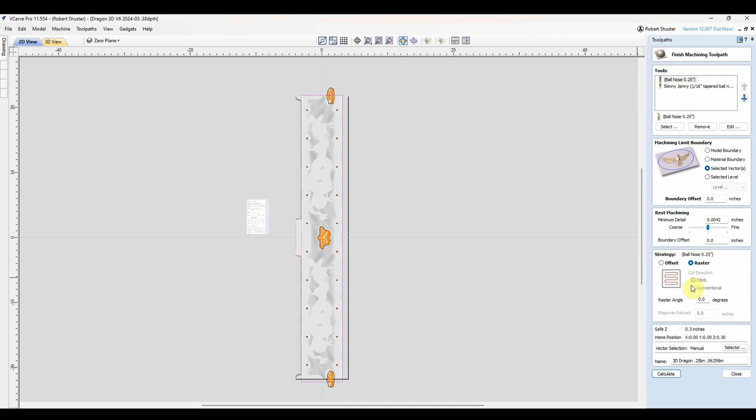For that one, again, I'm using VCarve Pro for both projects. For this one, I'm using a different kind of toolpath that I'd never used before, which in theory should be better, but in actuality, it didn't work out very well. For the finishing 3D toolpath, I'm using two bits, a 1/4-inch ball nose and a 1/16-inch taper ball nose. It's a Skinny Jenny from Cadence.

I've sang his praises before. I still feel those are some of the best bits on the market, a little more expensive, but a lot better, a lot more durability. I'm very happy with them. I'll keep supporting him very strongly.

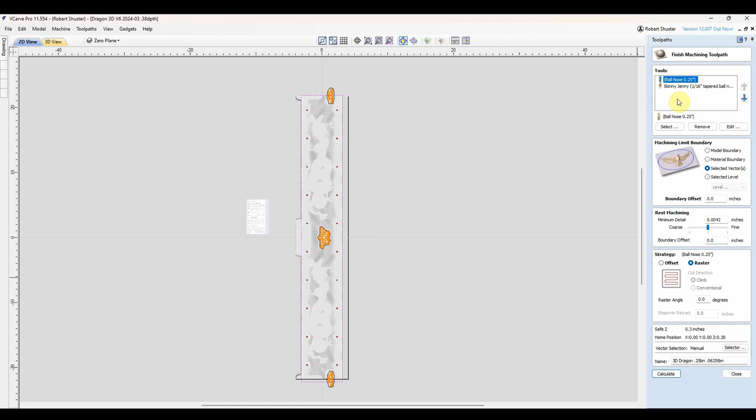Anyway, back to this. I'm using two bits for this. That's called rest machining when you use the two bits like that. Your first thought is like this is a roughing toolpath, and that's not what it is. This first toolpath does the low definition first, and then it will do the high definition later.

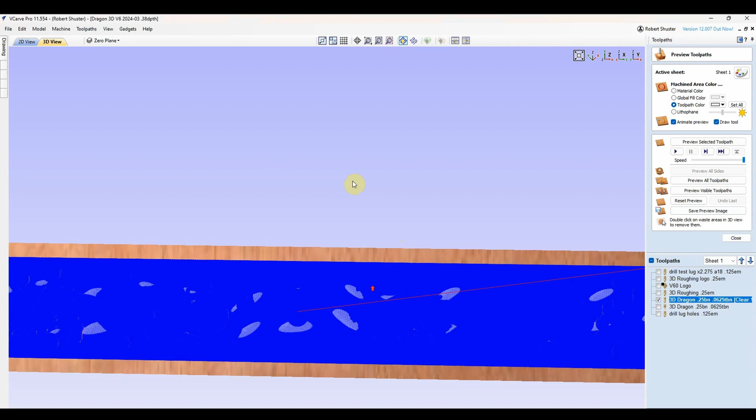Since I do a lot of talking on this, and then I have videos, there's not much to say about it. I'm going to run the video up in the corner here, so let's watch. I'll try to do the toolpath for this first drum with that one, and then when I talk about the other drum, I will show the toolpath for that one. So first is a 1/4-inch ball nose. Let's run that. Again, this is kind of slow rendering, so I won't talk during this, and I'll speed it up.

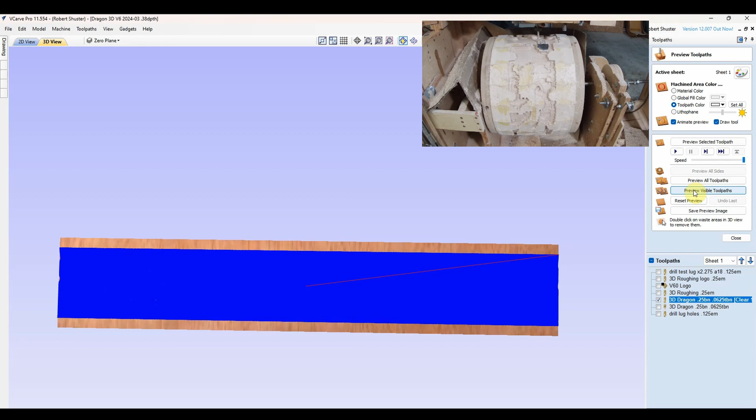The definition is okay on this. You can certainly tell it's a dragon, but once I do the 1/16 taper ball nose, it'll be much better definition. Let's go ahead and just show that.

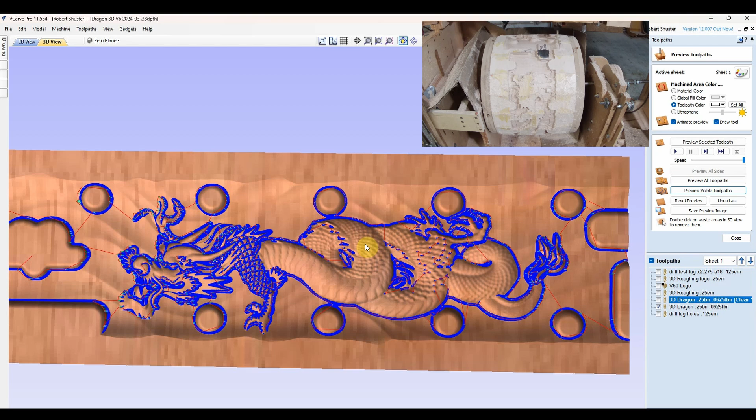This explains how the rest machining works better. The spots where like these scales aren't high def, relatively smooth, not that deep, sharp edges, the 1/4-inch ball nose should do fine. And then once we zoom in, we can see that the little 1/16-inch taper ball nose really gets those nooks and crannies much better.

So I'm going to undo this, so you can see that picture right there of the dragon. I'm going to run this toolpath, and you can see - oops, wrong one. Run this one, and we'll see how much better the definition will be. So I'll probably copy the screen here, and then run this and show still the other one. So I'm going to preview the other one now. Again, very slow, so you won't hear me talking for a while.

As you can see, these scales have much better definition, and the face, the eyes, even the eyeballs come out much better now.

So in theory this should be a lot faster. Let's pull up the two toolpaths, and I'm going to hit clock here. It says 4 hours 52 minutes for the 1/4-inch and 3 hours 22 minutes for the 16th.

VCarve Pro tries to guesstimate how fast it's going to be, and on my settings I usually beat these speeds by quite a bit. The more definition there is, the better mine does against those times. I have theories on how this estimating time works, and normally I can guess pretty close from that how long it's going to take. In this case, I was way wrong.

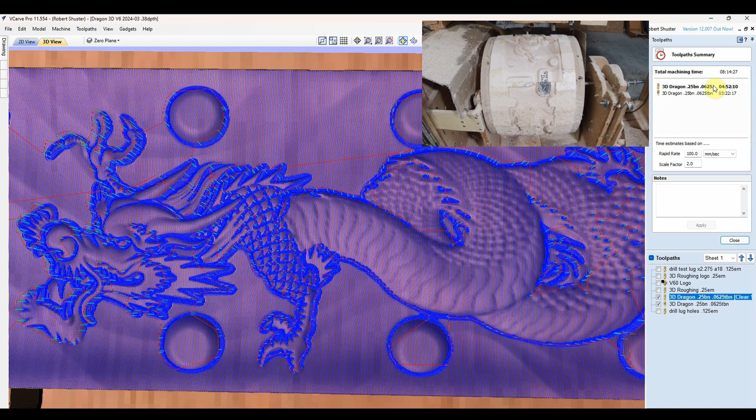The 1/4-inch ball nose, I beat that, and actually I had the setting set on that one a little different. My thought, which was incorrect, is that a bigger bit doesn't need as tight a step over, so I was running 10 or 12%. It said 3.5 hours when I ran it. That is not correct—you still need an 8% step over or less to get a good finish. Yeah, you learn from my mistake.

There were other issues with this drum—it wasn't going to work. I knew early on it was a test drum, so no big deal.

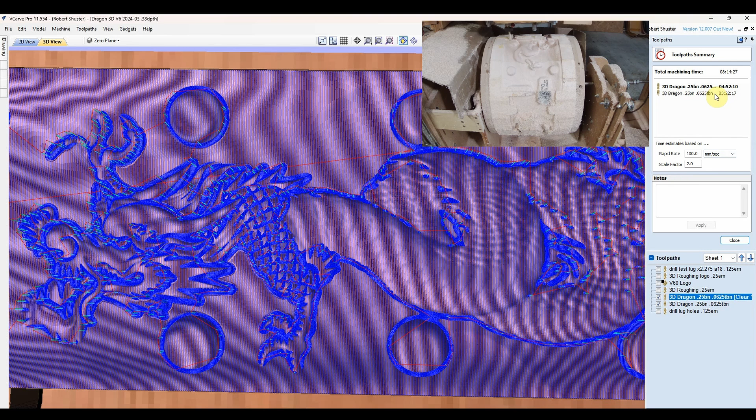Now the other part says 3 hours 22 minutes for that. So when I first did this, I thought I could have a good 3D drum finished in 6 hours, since I usually beat these numbers. I was kind of excited this might work.

Problems—first of all, the tapered ball nose one, I ran 5, 6 hours and it was only half done. It guessed completely wrong on the speed there. Completely wrong. And after we run this I'll unclick that—you can see these little tooling lines where it goes between bits. I had those, big time.

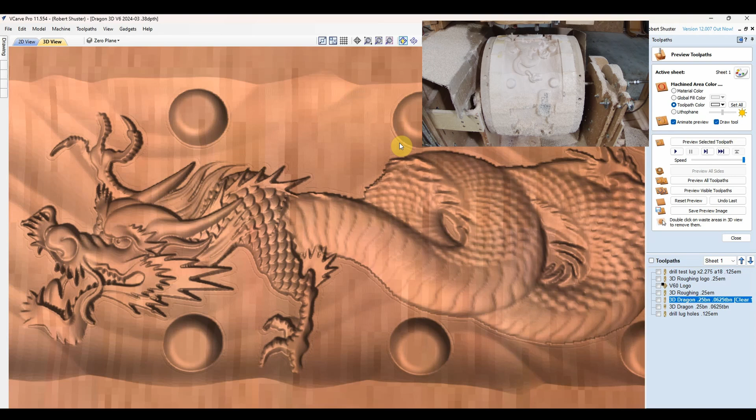I'd even raised the bit a little bit ahead of time, thinking I'd go a little high then creep down to the right setting to get a good finish and not show those lines, but I had them even at a higher Z height. So I don't think this is the right toolpath strategy for me. Maybe it works for somebody else, but I had bad luck with it.

When I go to the other one, we'll see the hours were a long time, 21 hours. I sped the speed up to 150% and got it down to less than 10 hours. The more I think about it, I could have sped it up more yet—probably down to 8 hours.

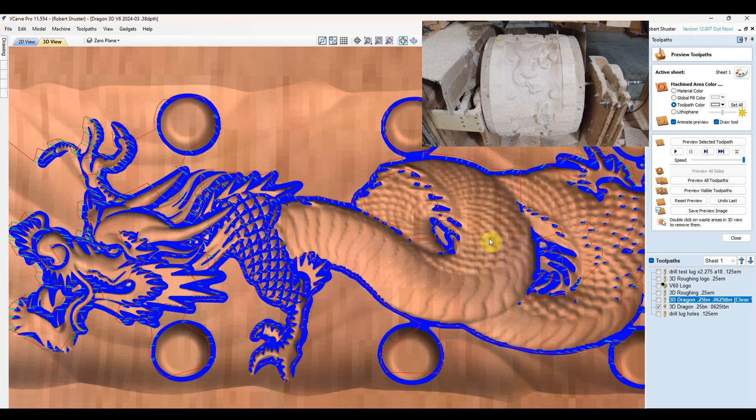So suddenly the non-rest machining toolpath is faster and has better definition. You see here these scales, that's where it didn't cut for the tapered ball nose. Even those areas look better with the 16th ball nose. I'll come back to that, but I'll probably cut and paste a picture to show both side by side. This definition is very good through here where it needed it, but these other areas where the 1/4 inch ball nose did it, not as good.

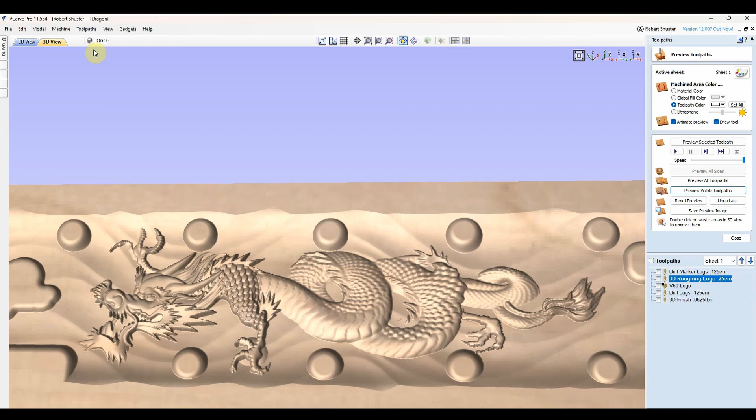Let's go ahead to the other one I have for VCarve Pro—this is the newer version. Let's go here, I'm going to reset, and we'll run that one again. It will be slow, so I'll stop talking and speed up the toolpath here.

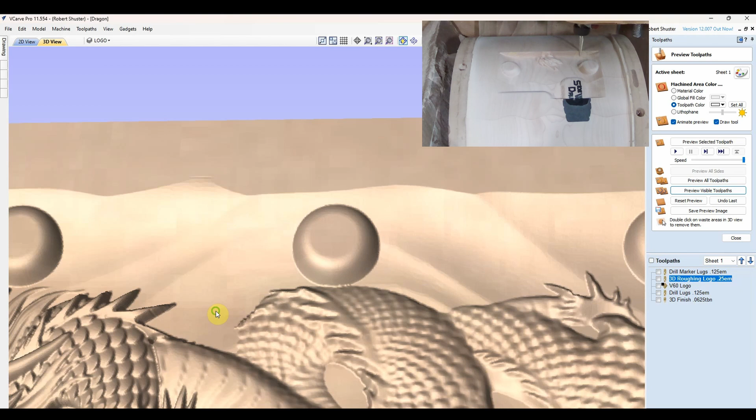So now that's done, the definition on this area is probably equal as far as 3D rendering, but with no telltale lines from switching tools. Again, even that eyeball just impressed me so much. I'll show a picture later of the actual drum, just around the eyes and teeth and all these little things—came out so good.

As far as executing a 3D toolpath, this is probably the best one I've ever done on my rotary machine doing a drum. I'm not saying it's my best design, though I do really like this design—it might be my best design. But actually executing, cutting out the drum, this is probably the best one I've ever done. I'm really happy with this finished product.

So let's talk about the toolpath now, how it's different. Again, I just used a single tool, a 1/16-inch tapered ball nose. My settings, I believe, were 8% step over.

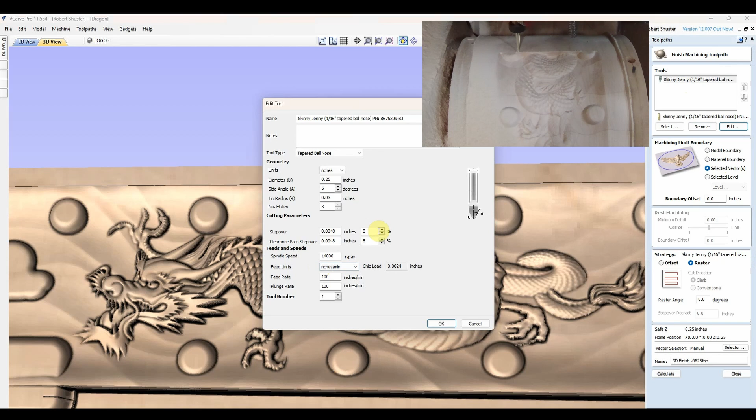The whole thing just came out so good. I am very happy with that. Even little things like this area right here, which doesn't look major, it's just a little kind of wavy background, came out so good that I didn't have to do any sanding. I shouldn't say any sanding, I touched up a few little specks and some fuzzies. There were fuzzies, you always get some fuzzies, but I put in a few minutes of cleaning up some edges like that instead of past drums' hours.

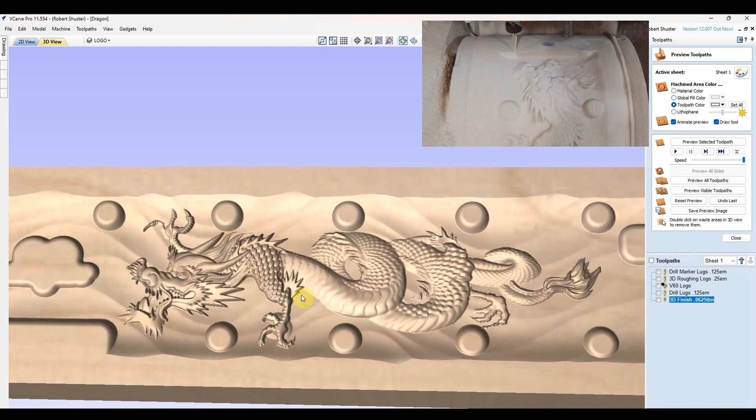When I got talking about the issues I had on the machine on this one, also the original drum, I had some machine issues, and I could have sanded out those issues. Would have taken many hours, and plus you can sand out these flat areas, but when there's issues on the actual 3D design, you can't sand out an issue there. It's so detailed that you can't get in there and do it right. So this drum, again, it took 10 hours to cut that 3D design, but the prep work for finishing after that was minuscule, much faster than normal. I got the things dialed in just right now, so I'm very happy with that.

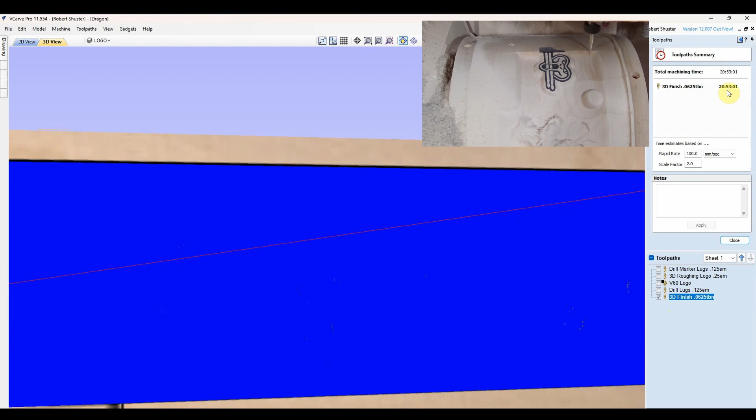I was talking about the speeds and feeds and how long it would take to cut on the other drum. On this, the second drum, let's take a look at what it estimates the time for this one. So 20 hours, 53 minutes, 21 hours basically. And this one, even without changing the speeds up on my machine, it'll do that in much, much less time, probably 11 to 12 hours if I leave it at 100% normal speed.

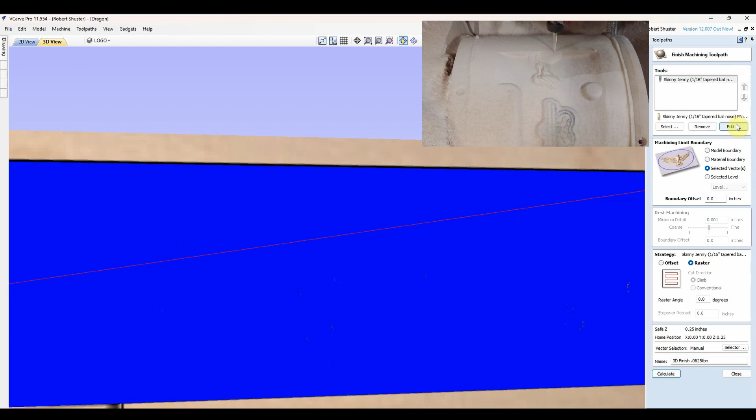For the drum I cut, I took it to 150%, which is 150 inches per minute. If we look at the settings on that one, it's set for 100. Plunge rate, feed rate, 100, 100. At 150, so it basically increased it to 150 inches per minute. And there'd be no problem punching that up to 200% at the machine. I could get it down a little lower, like I said.

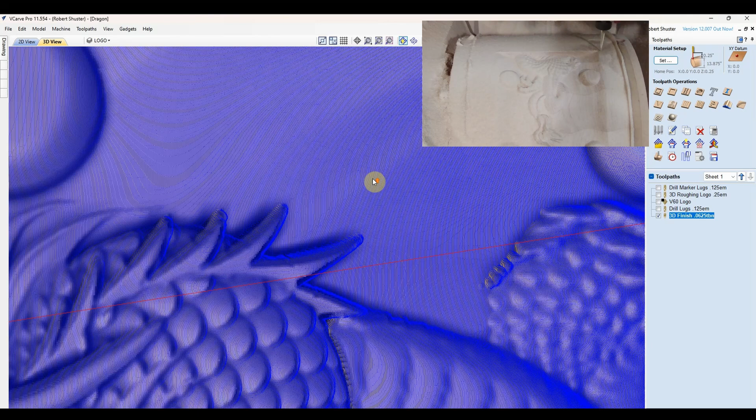Two things to touch on that. When you're doing a 3D cut, let's zoom in on this. You can see this line going up and down. What it's actually cutting is this line up and down like that. It's taking off basically 5 thou each pass, so very, very little wood is actually coming off each pass. That's why, even though you have a tapered ball nose with a 1/16 inch end on that, very fine and delicate, you're only taking off 5 thou, 8% of that little bit, so you can push it very hard and not worry about the bit.

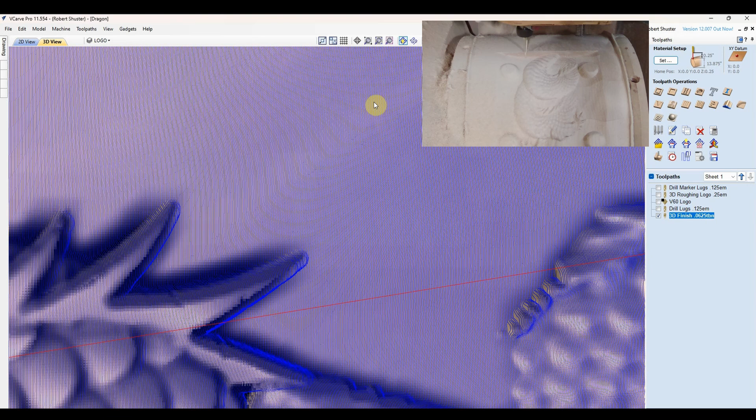Now, deep plunges in certain situations, which this one doesn't have, but occasionally if you have a sudden drop-off, you're cutting a very deep cut with that 1/16 inch at 100% instead of 8%. If you have a sudden hole or pocket that's going through - I don't have anything like this one, so it's not a worry for me on this cut - but it's something you should be a little worried about or conscious of, at least if you're doing cuts like this.

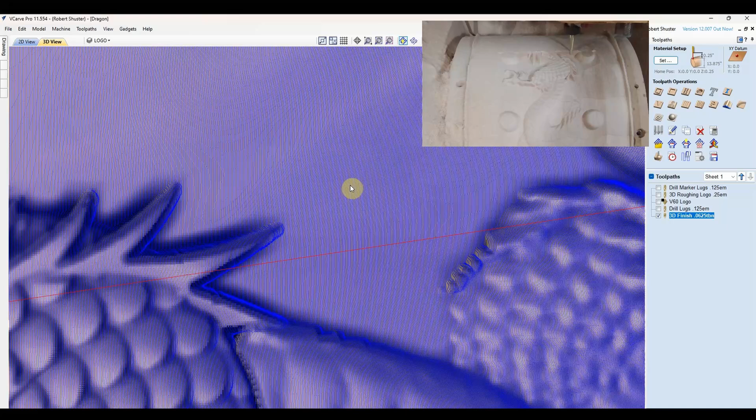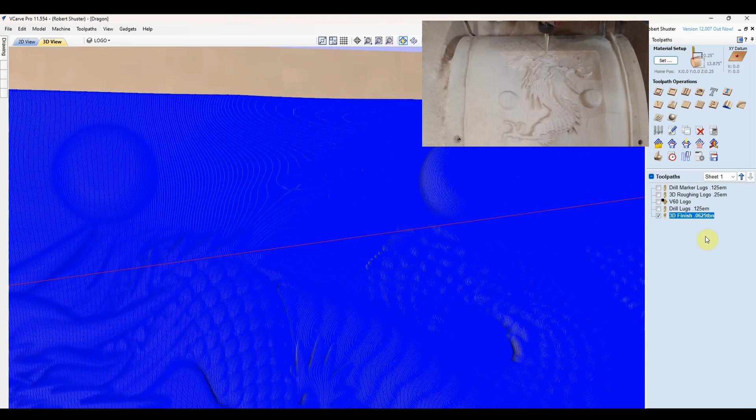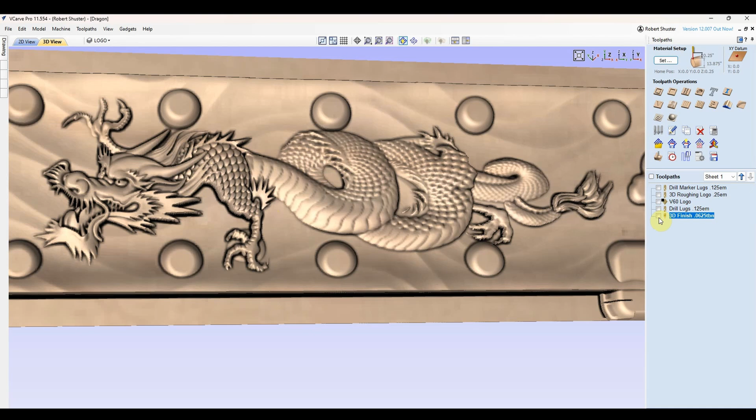But for this scenario, I crank it up to 200% and don't worry about damaging the bit or hurting the cut. I mentioned before, my machine, every machine's got a setup for the acceleration and deceleration. So as you're going through these jagged areas, it's not going to go 200 inches per minute. It's these long straightaways - this straight area through here will reach 200 inches per minute. And like through here, all these very little changes, it'll zoom through that nearly 200 inches per minute. Then you get to the changes, this area much slower, and the face much slower yet, all these things here. So I push 200 inches per minute on that machine all the time, no issues. And like I said, I can probably get down to 8 hours if I push it really hard.

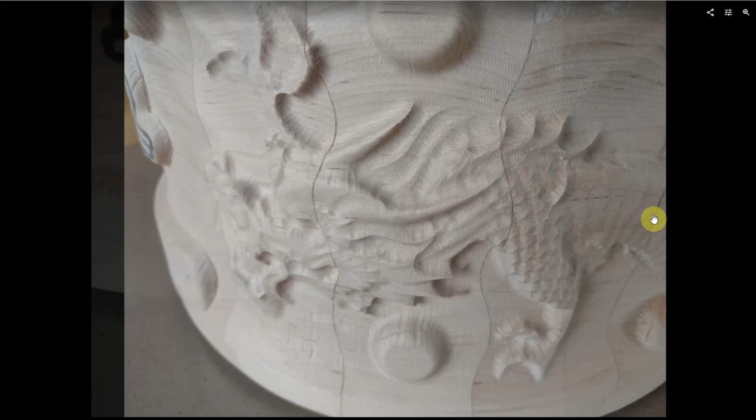The other thing I was having issues with the machine. See these issues right here where on the edges, you can see it in a few other spots. You can probably see it right here, down here and stuff. I was having issues with my machine. And the last drum I did, I was having somewhat issues like this, but this is even worse yet.

I was trying to figure out what the problem was. I was suspecting that it was the backlash nut getting loose and I was getting issues there. I took the nut off and it appeared fine, but once it was off, when I could slide the X plate back and forth in the gantry, I realized it was binding. There was dirt or some kind of issue in the linear rails. Once I cleaned that out, blew it out real good with the air hose, cleaned up what I could, put some oil back in there again. Wow, world of difference. So between the wrong toolpath and the machine issues, this drum was a complete failure.

But the next one, wow, it came out so good. Very happy with what happened in the end. I'll show some more pictures later.

I'm going to start out showing the carving of the drum. I know before, in the upper corner, I was showing the 3D toolpath, but that was late in the process. I'll start from the beginning here.

The first step is to do the epoxy for the logos. The first thing I did was carve a pocket around where the logo is going to be, so that I can fill it up with epoxy later without it spilling over the drum. I'm using a 60-degree groovy Jenny on this to cut the logo out.

I'm going to finish up with some beauty shots of the drum. First, I'll spin it around to 360 so you can see the whole thing. And then I'll do a few individual shots. Some of these shots have hardware and some are just a shell. My favorite one is this final shot of the drum with the face.

I mentioned before the details on the face, even down to the eyeball. It is amazing the detail I got on this drum. I am so happy with it. Once again, I have to say, this is the best execution of cutting a drum design out I think I've done so far.